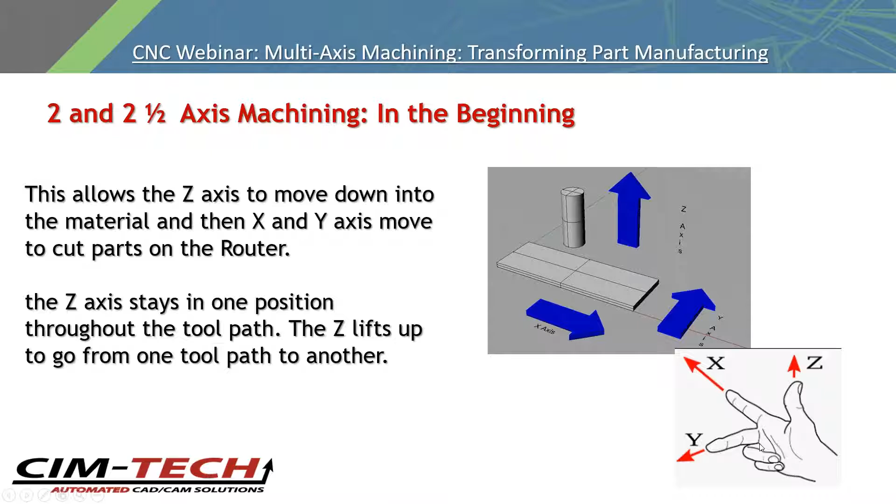And the little hand symbol here just shows those three, but then we're going to see how you can have the 4 and 5 axis as well, and even more than 5 axis. So there's just a little simulator there that's showing a tool moving in X and Y, and it goes up in Z to go from one hole to the next or one pocket to the next.

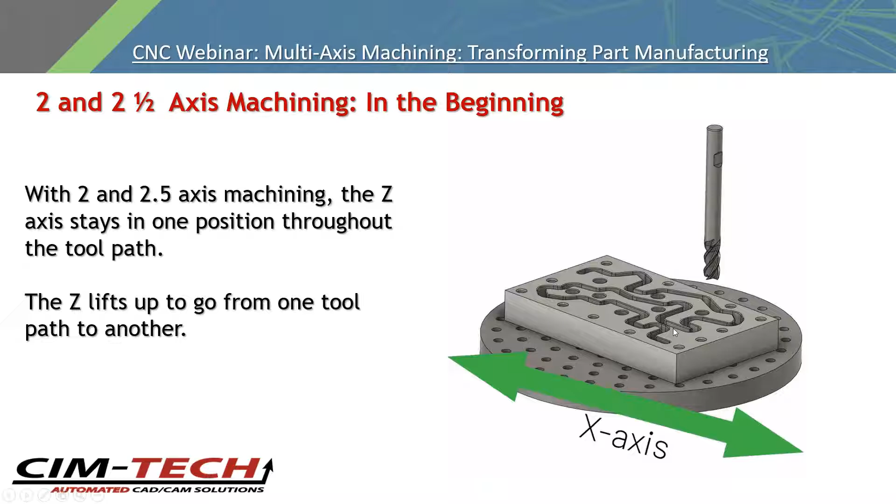This is typical of the 2.5 axis type of machining, where you're just routing, lifting up, moving over, routing, lifting up, moving over. Again, panel processing, almost all of it is this way. And you've got some pictures of some different 2.5 axis type of machining where you're cutting some cabinetry, and there's rabbets and holes and pockets and grooves in this material, and then some MDF doors where the tool stays down, perhaps, and cuts between the doors.

And the profile is a 2-axis profile. Although if you get square corners in these corners here, you can have the tool ramp up and down in the corner to do what's actually a 3-axis move to create a square corner operation.

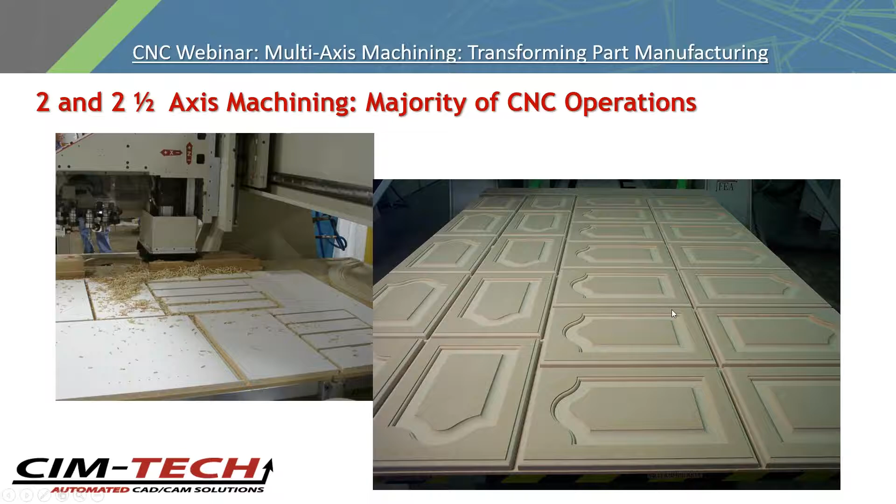And that term 2 or 2.5 axis could be deceiving because we like to tell people to ramp your tool into the material, and that's really an X, Y, and Z at the same time type of motion. That's a better way to enter your material instead of just plunging the tool in there, which can put a big load on your spindle bearings. It can burn up the bottom of the tool.

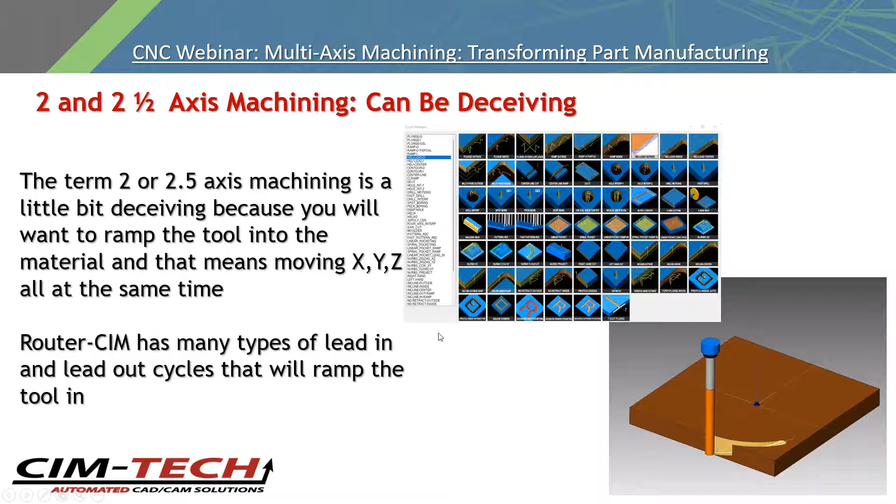And these slides are the different types of Router-CIM operations that you could do. This one is showing a helical motion where it is ramping down in X, Y, and Z. And you can tell that's going to be much better for your tool life right there. So even though it's called 2.5, that's really a 3-axis move.

Then we look at some 3D machining or 3-axis machining. Sometimes they call it 3D machining. It's really 3-axis, and this could be the X, Y, and the Z moving all at the same time. Now, in the little simulation you see there, it's really not 3-axis. It's moving in Y and Z and then stepping over in X, and Y and Z are simultaneous, and then X moves over. So if we had set the slice angle on this to a 45-degree angle, then every motion would be X, Y, and Z at the same time.

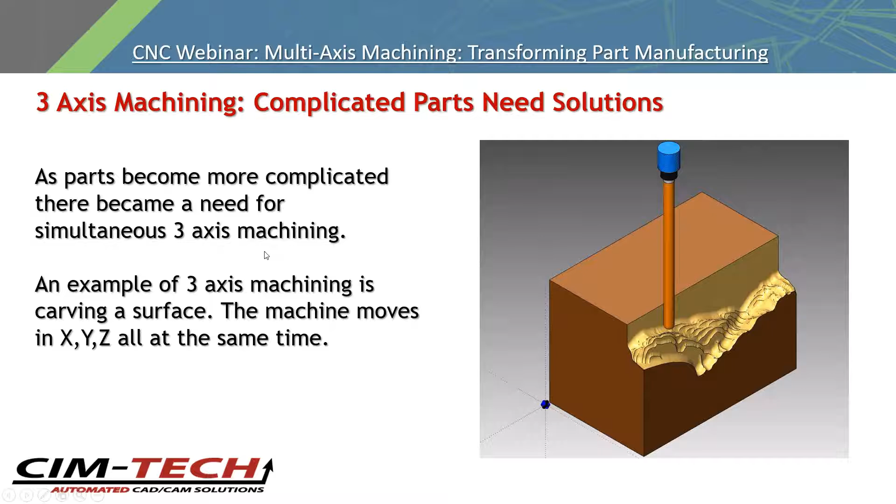So you can see as this is carving, it leaves these bumps on the part, right? Because it's a ball mill. You use a ball mill to get a finished surface or finished machining on the part. And the closer together you set the spacing, the finer the finish on the part. And if I were to go on a 45-degree angle, then I can go back on a 135 degree, just the opposite, and I could have like a crosshatch pattern across the part. And that's another way to give you a very smooth surface finish.

And here's a little video showing the tool. You can see it moving up, and it's doing that Y and Z simultaneously. And because it's a ball mill, you do have this thing called the cusp height, or sometimes it's called the scallop height. And so the closer together your step over is, the smaller that scallop or cusp height is, and the smoother the part is, and you don't need to sand it as much.

So you could see how long it could take to process these types of parts. There's a certain amount of time that's required, and you could either spend more time routing with a close together step over, or more time sanding with a further apart step over, and then you'll have to sand those scallops down.

There's a feature in the Router-CIM 3-axis machining called constant scallop height, and it will vary the spacing automatically to get you this uniform surface finish. So as it goes to like a nearly vertical wall, the toolpath has to get closer together to give you that same scallop height as it does across a flat surface.

So a lot of times with 3-axis machining, we're talking about carving. And a lot of people get excited when they see a really cool sign or some kind of carved image. They get excited to think that their router could do that.

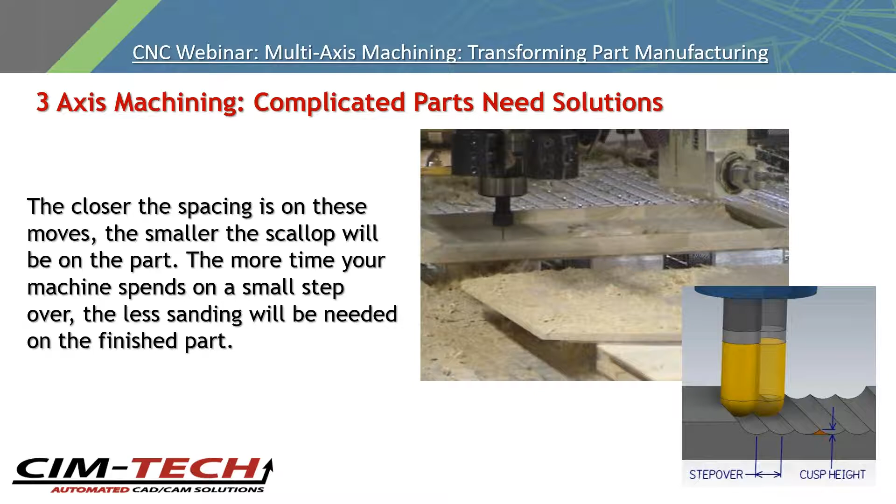But then when they go to cut that and it takes an hour or 2 hours, now it's not so exciting because you're probably not going to make that much money on that compared to in an hour being able to run 4, 5, 6 sheets of nested parts, right, in a 2.5-axis manner. So the 3-axis machining, it does look cool, but it takes time on your machine to make a finished product.

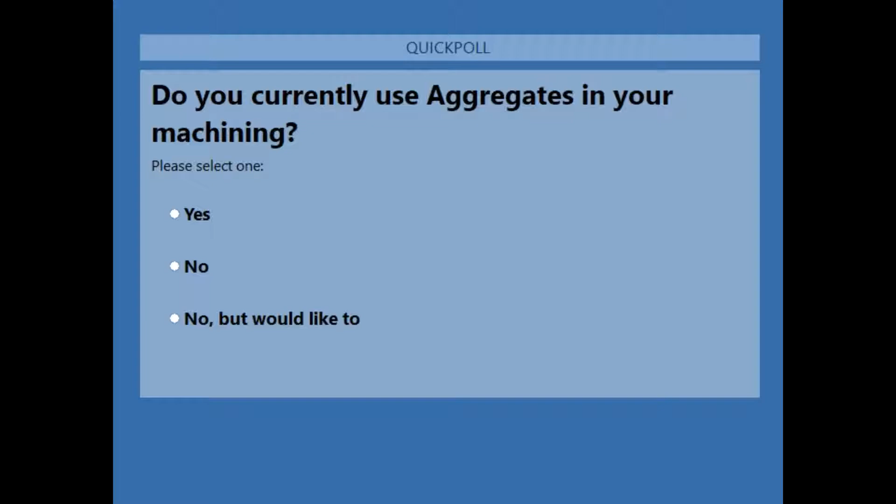Here's another survey question. All right, Kenny, thanks for taking that time to go through those. So we'll go ahead and load up this next survey question for everyone. Do you currently use aggregates in your machining? Yes, no, or no, but would like to. So we'll give everyone just a moment to put in those answers. All right, so let's take a look. Oh, it's a pretty even split. It's pretty interesting. So Kenny, we're gonna have you go ahead and tell us about aggregates.

All right, so after the 3-axis machining, we could talk now about 4-axis machining. And on woodworking machines, the CNC routers, 4-axis oftentimes means a C-axis or an aggregate, using an aggregate machine. So this is an aggregate tool that can go in a tool holder, and there's a lock pin right here. It's a little pin that fits in this ring. It fits in the spindle plate, and a lot of people, when they see this image, they can understand better what a C-axis is. This motor is the C-axis, and it rotates that lock pin so that this aggregate tool can face all different angles.

You could rotate it 90 degrees to do one side of the part, rotate it another 90 and do the other side of a part. So, or at any angle, you could rotate it 360 degrees. And it can also be rotating while the X, Y, and Z are moving as well, so that you get the full 4-axis motion at the router. So a C-axis is very common on a CNC router.

There's other machines that have 4-axis that's not an aggregate. They may have a rotary attachment, like a lathe, for example, and the spindle can go and do its X, Y, and Z while the part is rotating. So some machines out there have like a lathe attachment. That would be a 4-axis operation. But most commonly, it's this aggregate and the lock ring that rotates the aggregate, and it's a programmable angle. So in the program file, it would be something like C 90.2 degrees, and it would rotate, or 95 degrees, or 180 degrees.

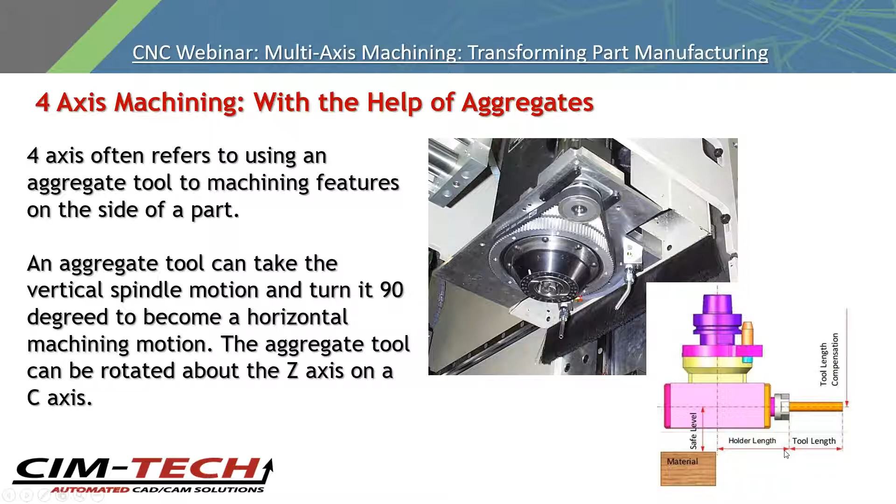And this example aggregate can take your vertical motion and turn it into a horizontal motion. And you could also imagine putting a saw blade on here, and it would be a saw that could rotate at any angle. And here's some examples of aggregates. A typical operation would be doing lock sets on a door. So you want to machine a mortise lock on the side of a door, or a cylindrical lock on the side, or even the hinge plates on the side of the door.

This little guitar body is here. The C-axis is rotating. Oops, sorry about that. Let me go back on screen. The C-axis is rotating as it's moving in X and Y, but it could also move up and down in Z as well. And so this is what's called a molder head aggregate. And you could do straight moldings, but in this case, it's doing a curved molding. So the C is rotating while the X and Y are moving, right? So this is a vertical machining operation.

Here's a horizontal machining operation where it's doing some pockets or drill holes on the side of the part, and then that could rotate and affect this side of the part as well. So the C-axis or aggregates can give your machine a very expanded set of capabilities, and many machines can even be retrofitted with the C-axis. If you only have a 3-axis machine now, you may be able to get a retrofit.

They also make these aggregates with 4 sides, for example, so that you could do the front, the back, the left, and the right side of a panel, but you couldn't do like one of the odd faces on a stop sign, for example. So you get the C-axis if you need to do some stuff on an odd angle, or if you need to rotate that C-axis simultaneously with the X and Y. And there you have a good example of that with a molder head. And there it is an aggregate, but they also make machines that have a full molder head spindle. So it could have a 20 horsepower molder head on a separate slide there, and that would also be a separate axis.

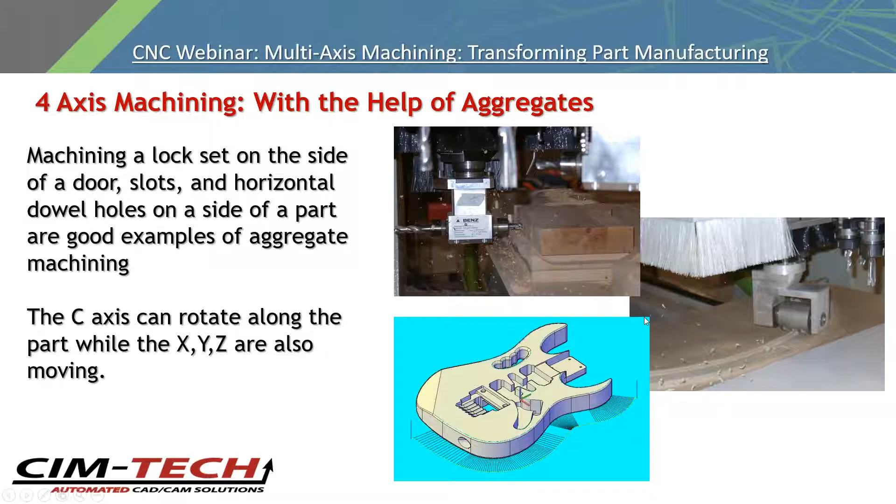This is a great example. This is an Onsrud machine showing what's called an adjustable angle aggregate, because you can take that angle there and adjust it. So this tool can be adjusted at different angles. And what they're doing there is making the square corner in an MDF door that has a compound profile on it. We can do some of this as a 3-axis move if it didn't have a compound profile. So if it was just a flat edge there, we could do it with a 3-axis move.

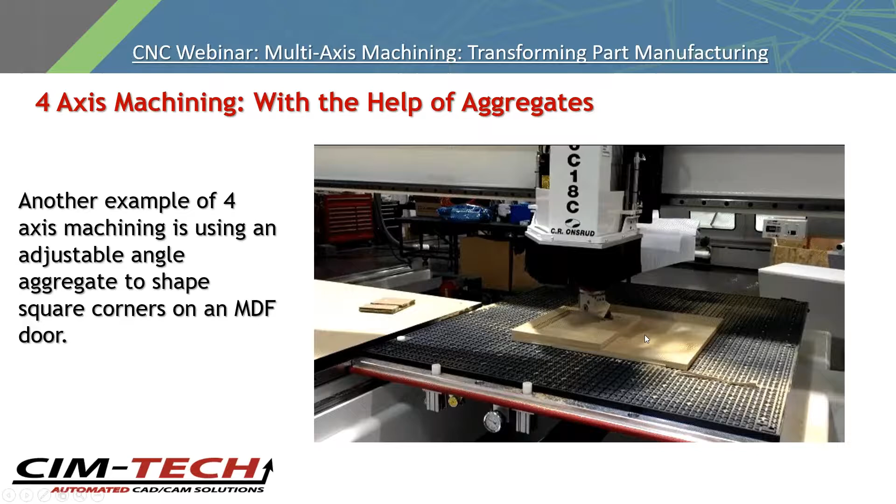But in this case, that tool, there you go, see it pivoting around the C-axis, and X and Y can move at the same time. This is a very popular MDF door model, and they use this type of 4-axis machining to do that. That could also be nested. Here they're just showing it one part at a time, but those doors could be nested, and you can do this with a whole bunch of pieces on the table at once.

Here's another survey question for you. All right, so we do have our next question for everyone. Are you experiencing any bottlenecks in any multi-axis programming? Difficulty drawing parts, difficulty in fixturing parts, long cycle times, other, or none, not applicable? All right, everyone can put their answers in. A couple more seconds for everybody, and let's take a look. Okay, so we actually have quite a bit of everyone saying none or not applicable. So let's take a look with Kenny to see what we have next.

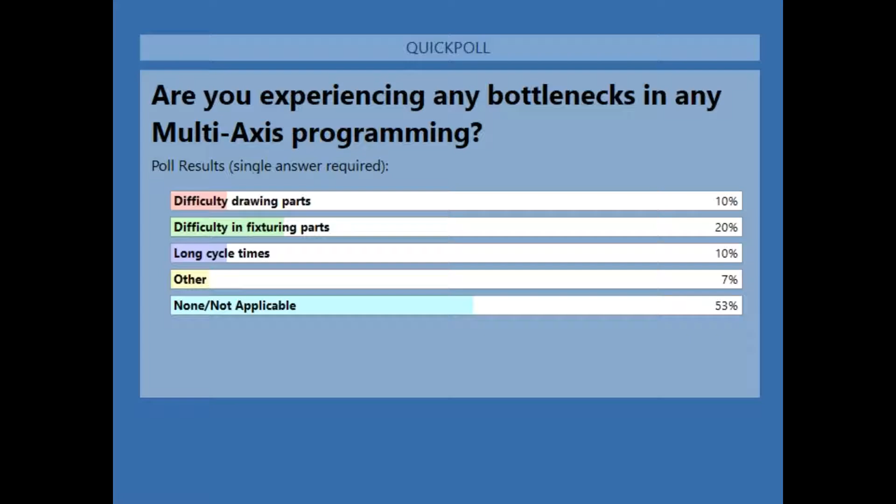All right, now we can move into the 5-axis machining. And the real advantage to the 5-axis is eliminating the need to manually reposition the part. So here you could see some different examples of machinery. You still have the X, Y, and Z, but this is what's called a yoke style 5-axis head.

And now you have, remember I said there was an adjustable angle on that aggregate? On the last simulation we saw with the Onsrud, that was a fixed angle. Well, on the 5-axis, that can be programmable. So that can move on the A-axis simultaneously with the X, Y, and Z. And then there's the C-axis, which is just like we saw on the aggregates, right? Now, these letters, A, B, C, it's up to the machine manufacturer to label those axes. So they may not always be called A, and they may not always be called C.

This is a different type of 5-axis head. It's called a nutating head. And you still, again, have X, Y, and Z. And then you could see here, they're calling this one a C and a B axis. So they're just slightly different axes designations, but they still make it so that the tip of the tool can really do any kind of motion. And here's another example of a machine showing different axes on there.

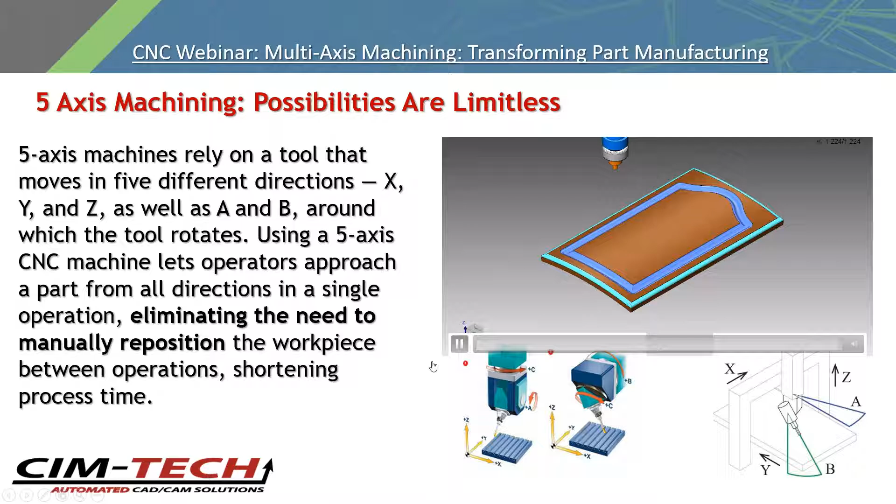So here's some different examples that the CIM-TECH 5-axis machining module has. Just like with the 2.5-axis, you could do drilling, you could do profile cutting and pocketing and roughing and finishing, and just about any intricate shape can be programmed. You're driving the tip of the tool. So this 5-axis contour is really what it's running here on this part that's got some angle to it.

And the slide that we're showing there is like a windshield for a motorcycle or a boat. And so when they're vacuum formed, you need the tool to remain perpendicular to that edge and do the trimming operation. Same thing can happen when you take a boat out of the fiberglass mold. You want to trim the edge of the rough fiberglass out of there. So you keep the tool perpendicular to that edge.

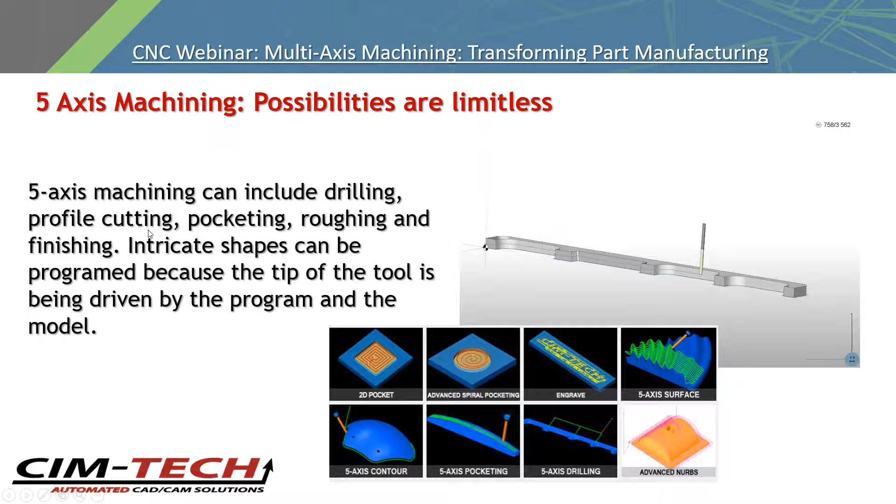But you could also do 5-axis pocketing and drilling and different types of machining as well for surfacing and so forth. So you really have quite a few different types of machining operations. Let's think about that drill there. So they're drilling holes at a weird angle on this slide. You could fixture the part so that that weird angle is straight up and down on your router, right? And then just do a straight 2.5-axis move on there. But then you'd have to reposition it to do the outside profile, right? So that's why that 5-axis eliminates all those reposition moves.

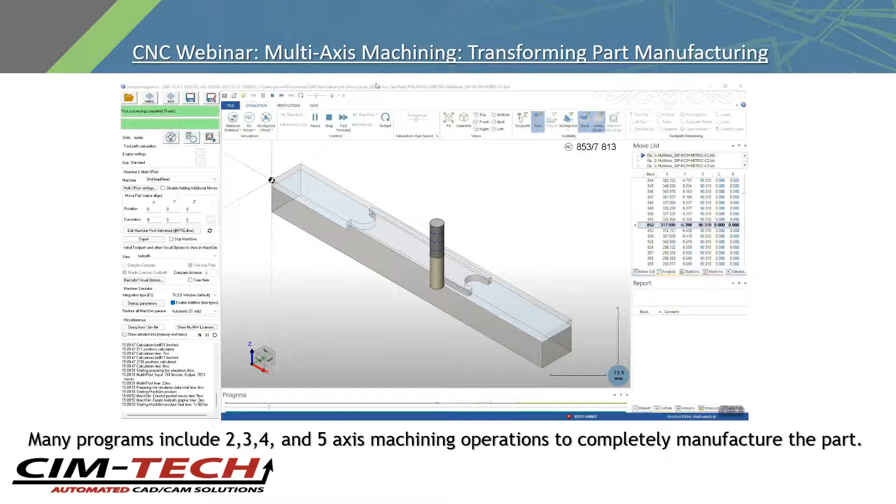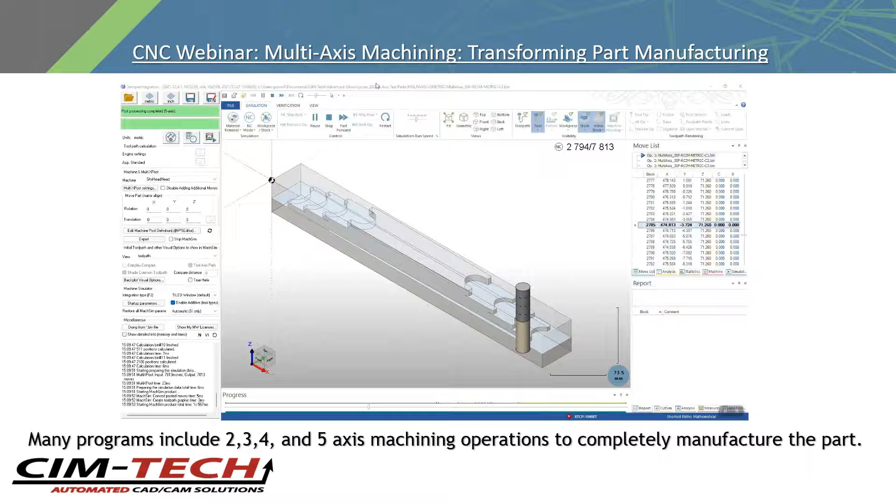Many times when you want to do a 5-axis part, you really start by using a 2.5-axis machining operation. And that's what you're seeing here first, some pocketing. So it's going to take this solid block and start removing the material in a 2.5-axis mode. So this is just like the regular RouterCIM does now. It pockets in a 2-axis mode, and you could use a flat end mill here. And it looks like it's a pretty large end mill so that it can remove a lot of material at one time. So you're going to start with this type of 2.5-axis pocket, then go back with a ball mill and do some finishing operations with the 5-axis mode.

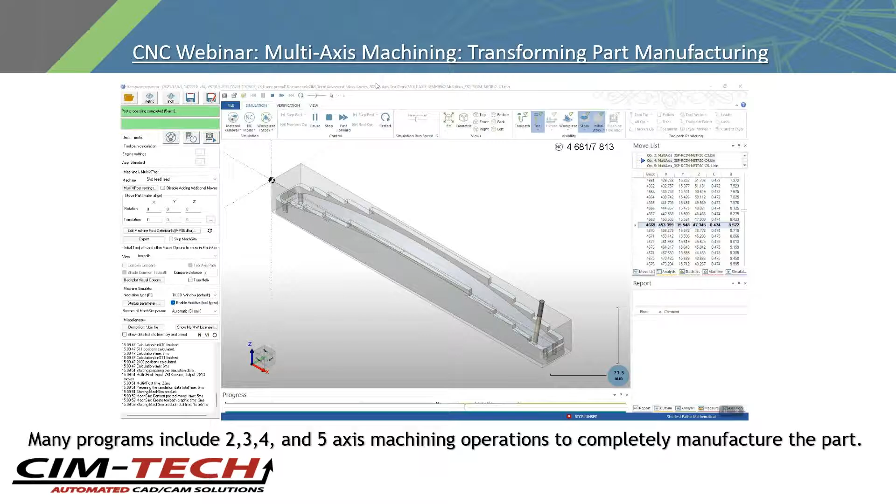So a lot of times you're gonna mix and match toolpaths. You're gonna have some 2.5-axis and some 3-axis and some 4 and maybe some 5-axis all inside the same program. It's not just everything with the 5-axis tool. You could do that, but then that would take a lot longer, right? It would take more time to go and use a small ball mill and carve the whole thing, because this smaller tool only takes a little bit of material at once. And that's what you're seeing next, the ball mill going through and doing some different operations. And the head is tilting as it's doing that.

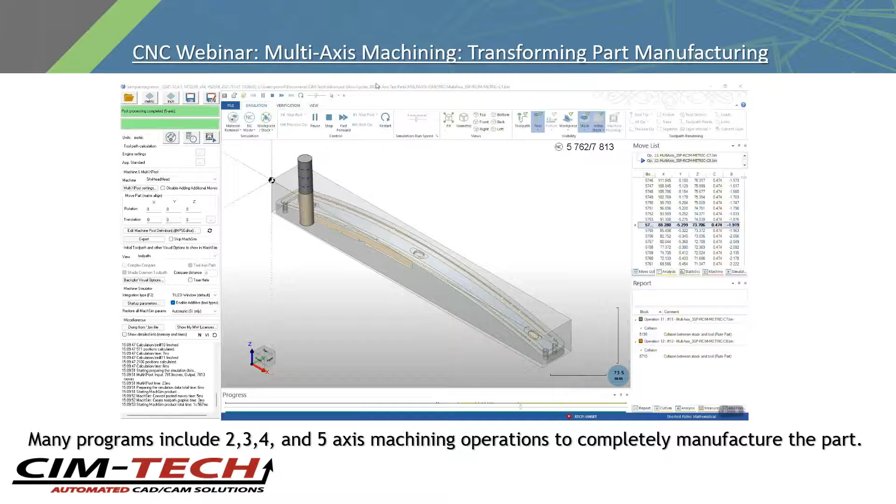And so simulation is another thing that becomes very important with 5-axis machining. You're going to want to see how the toolpaths affect, and if there's any crashing, tool crashes, it can check for all that.

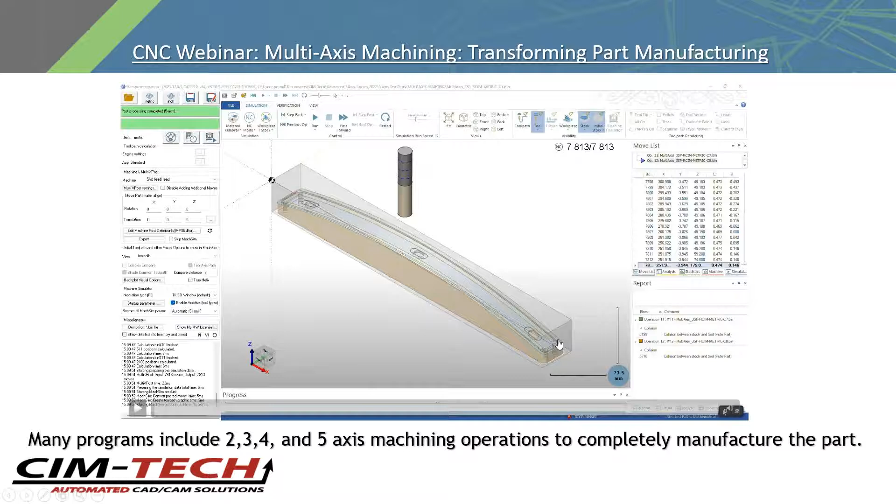All right, so again, the simulation, you're going to want to see what the paths look like, and this is just going through and finishing with the ball mill in a second here. Go through and finish all the part up. And there's a little simulation of a 3-axis, 4-axis, and 5-axis part. So like the drilling there is just a 2.5-axis operation. The pocketing you saw was 2.5, and it did some surfacing.

You're only limited by your imagination with the 5-axis machining. And so on a part like this, we could tilt the part so that this faces up and do a 3-axis move, or 2.5-axis to do that pocketing, and tilt the part so it does this. But if we leave it on a 5-axis machine, we could do those drill operations, change tools and do pocketing, change tools and do the pocketing on the side and on the top, and we could do it all without having to reposition the part.

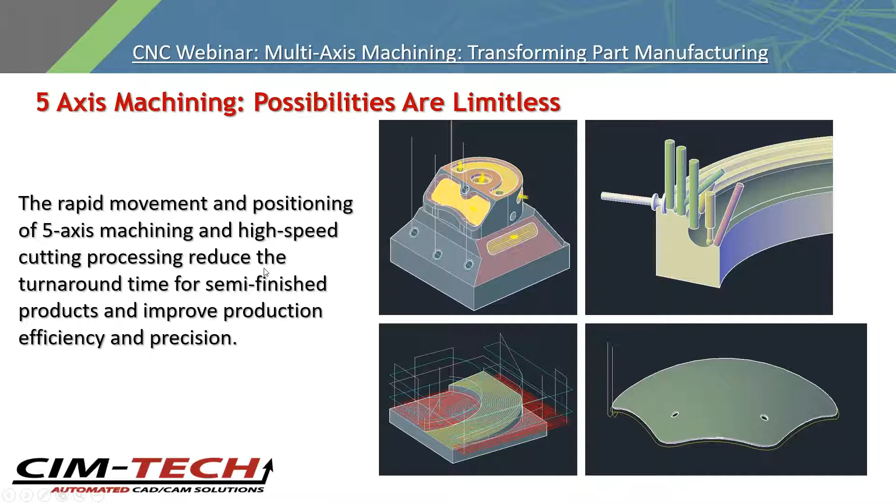That 5-axis head can go all around this part and do all the required machining without having to reposition the part on the table. And it's just showing some different examples there. Again, here's a shaper tool that's going to be on its side as it does this operation, and another tool is going to be on this angle, and this one's going to be on this angle. So you can see the different operations that could happen on there. Only limited by your imagination.

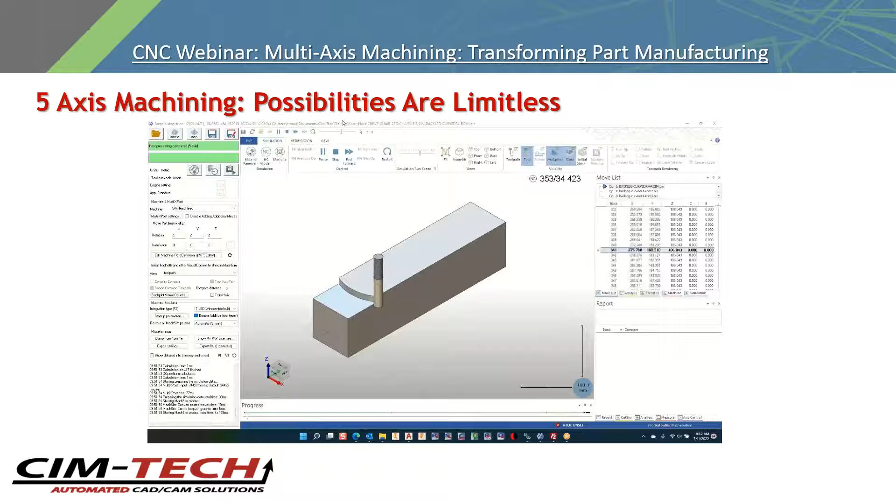All right, here's another example. Now this is where, when we talk about woodworking and 5-axis machining, you're really going to think about complex furniture parts. I talked about like trimming a motorcycle windshield. Sure, you could do that, but if you're doing woodworking, the majority of things are going to be complicated furniture parts. And that's going to be stuff like a Queen Anne leg, right? And that's what it's doing here.

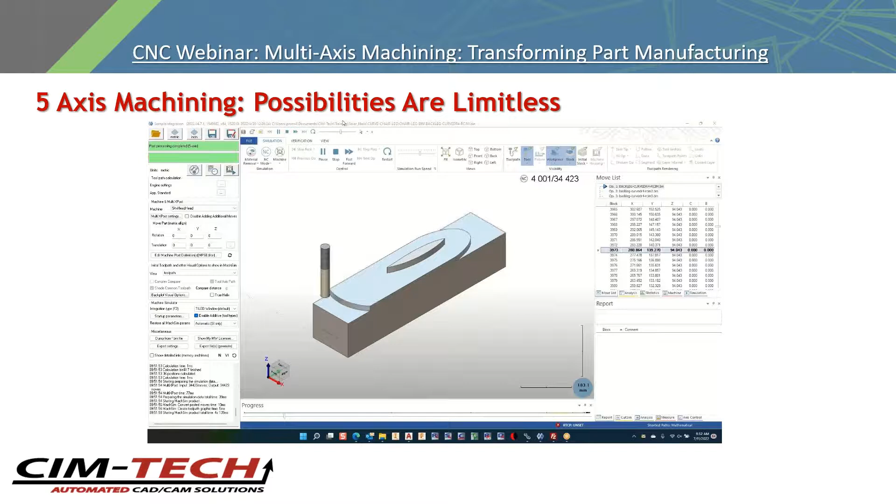It's going to go back and forth, and it's going to mold that Queen Anne leg with a ball mill, and then go back and do some 5-axis machining to carve the whole thing out. I can run through this and give you a little more visualization. So we really had to remove a ton of material there, and now there's the ball mill going back and forth. And that is the 5-axis type of tool paths.

And then the next operations, you could see it going and carving from one angle and the next. And that's it. So it's complicated. 5-axis furniture parts, very common. You can see the carving on the side there. So that step over applies here as well. And so the closer together you have your spacing, the finer that surface finish is, and the less sanding you have.

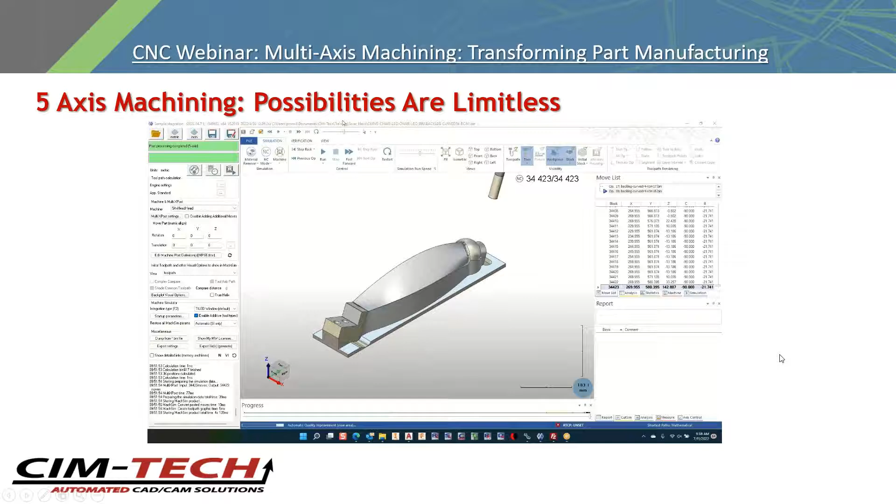So no matter what, you're going to have sanding because the ball mill is going to leave little bumps on the part, right? I'm going to put a little ball on the end there. So you can think of things like a newel post or any kind of furniture where you have complicated machining. That's where the 5-axis can really shine. And they produce that part in just a couple different machining operations.

Now, when you say 5-axis, your machine may have more than 5 axes. A surprising feature here is a machine like this one that has 4 spindles with programmable head spacing. So when you come across a machine like this, the axes to space each head out, that's another axis. So when you've got a machine that has this complicated multiple head programmable spacing, oftentimes the machine vendor has to go to a more sophisticated control. They have to go up to the next level controller that could support 6, 7, 8 axes at once.

So you still have your X, Y, and Z, but now you'll have your spacing between the heads, 1, 2, 3, and all of those are programmable. And these spindles, each one of those might have its own C axis as well. It may be able to rotate the tool about those axes. Today's machines, there's really no limit on their complexity. This one has 4 spindles with 4 tool changers, but that doesn't mean they don't make it with 6, 7, 8 spindles, as many as you want.

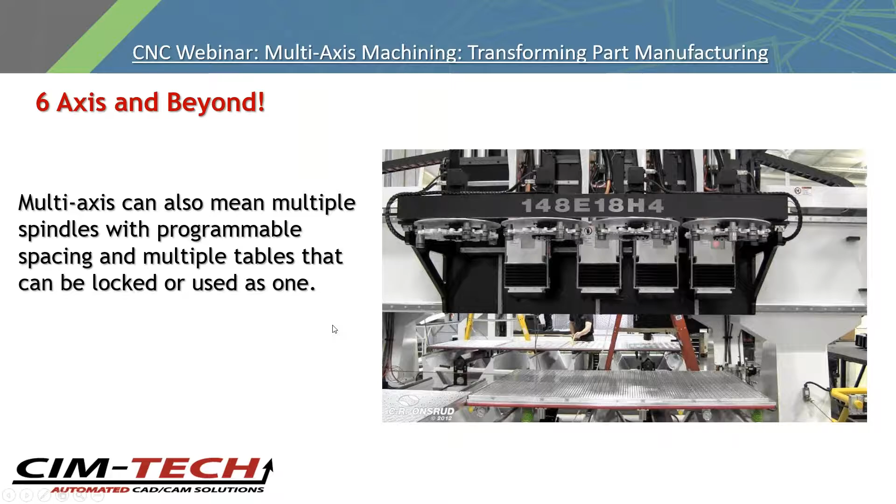And that does add to the complexity of the post processor, because now you've got to be able to tell it what the spindle spacing is. So there's an example where it could be more than 5-axis and not have that 5-axis rotating head and so forth. All right, let's take a look at how we can leverage the existing Router-CIM tools to use the new 5-axis machining operations as well.

Inside the CIM-TECH software, the core product is called Router-CIM, and there's something called machining knowledges. So the 1/2-inch router bit doing 1,000 inches a minute in a counterclockwise cut direction, all those settings are saved as machining knowledges, and you can use those over and over. And then there's integration with AutoCAD. So I can just use AutoCAD's move, copy, rotate, erase, zoom in and zoom out, or drag and drop parts from other jobs. That's a very powerful feature right there.

And anybody that uses CAD/CAM software knows that you have the same set of commands that you use all the time, like move, copy, rotate, erase, zoom in and zoom out. We use the AutoCAD version of those, which makes it a little easier to learn and use.

Now, when it comes to 5-axis as well as 3, you can have multiple machine output. That means you could run your program on an Onsrud today, but you also want to have the program available to run on your Biesse or your Northwood or your Homag or your Komo, or any number of different machine manufacturers. They all take slightly different programs. So you want to be able to take this same sheet, for example, and output it so that it's available to run on any of your machines.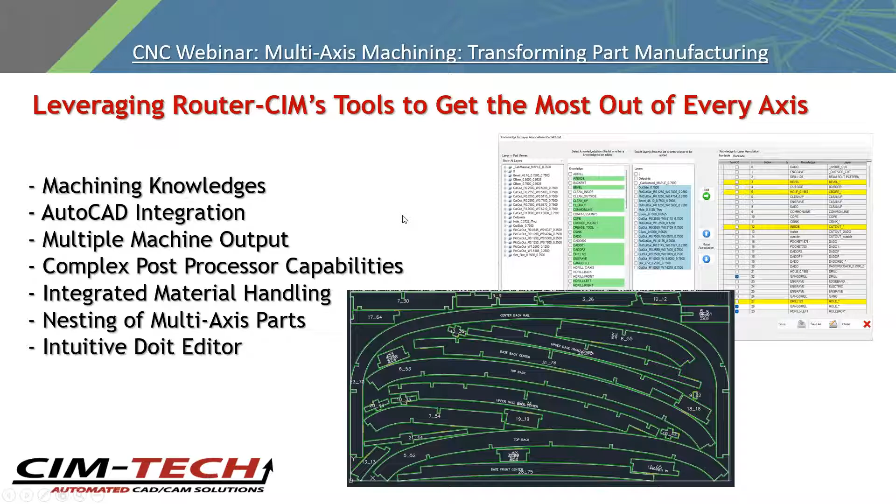So let's look at, in conclusion here, how the CIM-TECH software can integrate all these different types of machining operations, whether it's just 2.5-axis pocketing and drilling and panels processing, to 3D carving, all the way through aggregate machining with a molder head or a saw aggregate, or just drilling and routing on the side of a part, like the entry door operations for hinges and lock sets, all the way through to complex 5-axis machining that's now available inside of Router-CIM. We call it the 5-axis machining module.

And you get them all inside of one product, and all that product works inside of AutoCAD. So you get an integrated and automated CAD/CAM program that can handle all those multiple axes, including the ones we talked about, like that multiple head spacing. And you can do all that with the CIM-TECH software.

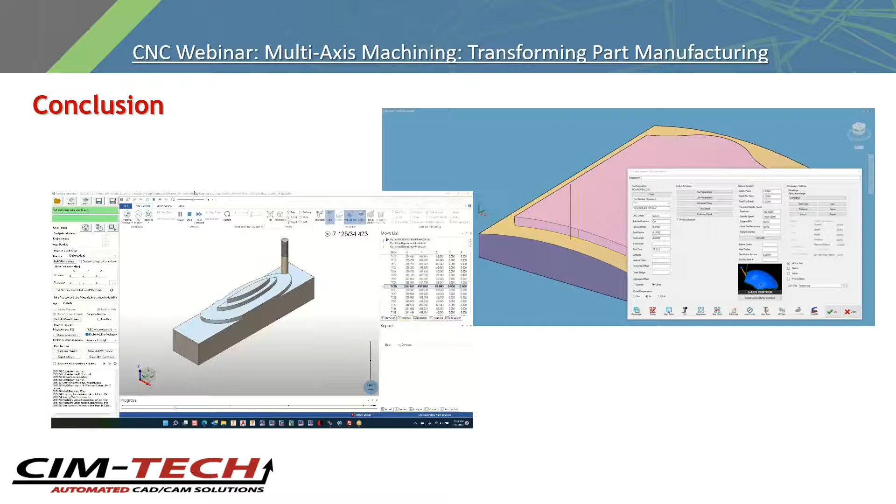With everything that you went over today, it's no wonder that we have quite a few questions that came in. So we can take a look at some of those here. Are there any limitations to what you can program in 5-axis?

You know, I like to say you're only limited by your imagination, but you're going to be limited to what you can draw or model as well. And so if it comes to designing a very ornate chair leg, for example, you may need to get an existing product and take it to a rapid prototype shop and have them scan it for you to make the 3D model or a 3D surface.

So you might not be able to draw a complex lion claw on a part, but you could definitely find one and get it scanned in 3D, and then you'd be able to program it. So drawing it might be tricky, but scanning it is a solution that can apply for a lot of people as well. Gotcha. Okay, so it's really going to come down to what you can draft and get modeled up.

Another one we had that came in, will this work with older versions of Router-CIM? Oh, that's a great question. So the 2, 3, and 4-axis machining can work with any version of Router-CIM, but the 5-axis machining module needs our latest technology in Router-CIM 2022. Gotcha. Okay, so thanks for clearing that up. I know that was pretty similar to what we've seen in the list of questions here.